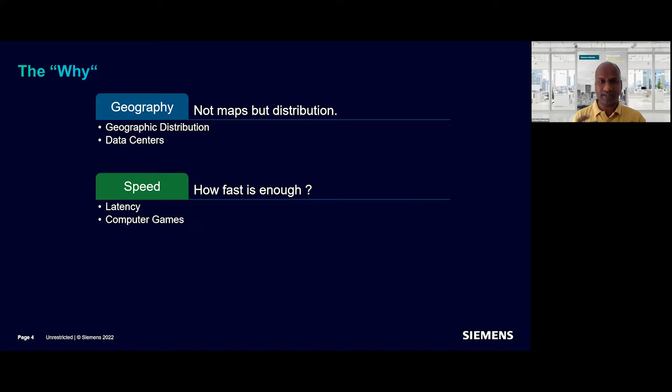And third, a very important attribute I would like to introduce is something called human nature. Today, if I'm doing any operation on my computer or my smartphone, I expect results immediately. The moment there is, let's say, about 5 or 6 seconds delay, I become a little impatient - something is happening, probably it's not working or whatever it is. So that also shows that a lot of processing in terms of maybe UX, where I give feedback saying don't worry, it's happening - things like that.

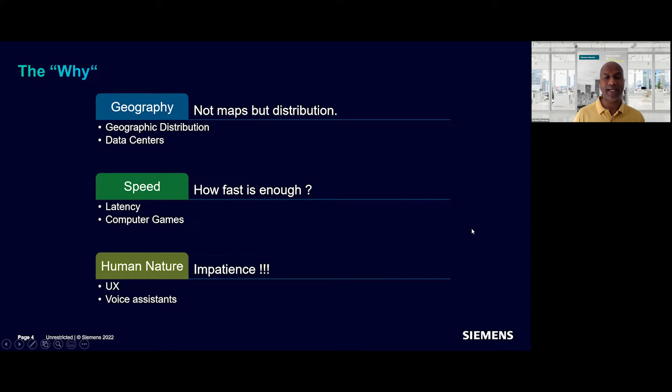Voice assistant, for example, we have at home - I can speak to Alexa, say what's the temperature today? I expect immediate results, otherwise I think maybe this guy is not functioning. So these are some of the attributes which take us towards what is needed in edge.

And moving on a little bit towards the huge organizations, the big money people - for them, from their perspective, why do we need edge? One of the most important things is cost, which is driven by connectivity and communication. So when I say connectivity and communication, if I need to be connected to the whole world in whatever ways we need, I need to pay for it. The connectivity itself, I need to pay for it. So it's cost for me.

And when I send data through these networks, the bandwidth, I also need to pay. Individually, when I use this connectivity and communication it may not feel so expensive, but the huge manufacturing industries or energy industries, when they start using it over a period of time, the cost can be really high. I mean, even we can look at our electricity bill - some months, if it's too high, we get a little worried. So you can imagine what the huge factories need to face. So that's an important aspect.

And the last point that I've covered, but I think the most important one, is data security or data privacy. There are still a lot of industries out there who don't want to share the data. They have their own IP, and the IP is protected by the data that gets generated out of these factories. So they want to ensure that the data remains within their factory. Data security and data privacy plays another very important role in what we drive in terms of edge. So that was roughly a short introduction to edge.

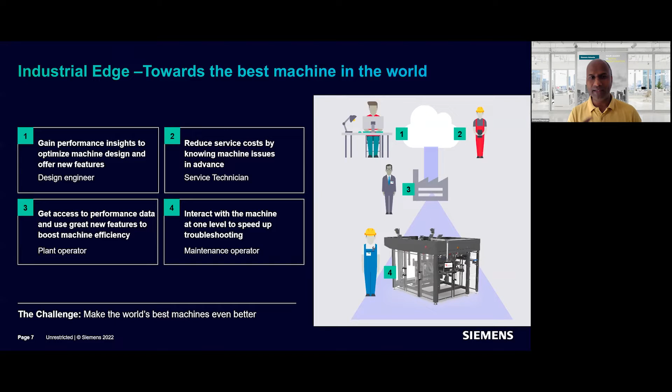So the challenge now here is to all the time make the world's best machine even better. That's the goal, right? For all of us in any work that we do. And this you clearly see, Edge is getting us there.

Now let's look at what this gives us when we do all of this, right? So industry IoT, we know IoT is rapidly growing. It's a market which there's no bound on how fast it is growing, and these IoT devices or the sensors and the things that can get deployed, the really small machines, are completely changing the way we interact with a factory. So this goes a long way in enhancing the edge profile as well.

What they could do is, by having a lot of data in the environment where it is being operated... we also have our software, right? We test it really well. We ensure zero defect if possible before we release it to production. But we clearly know once it goes to production, we still get a lot of defects or it behaves in a different manner. So the environment where it functions is completely different to how an OEM would test the machine within their environment.

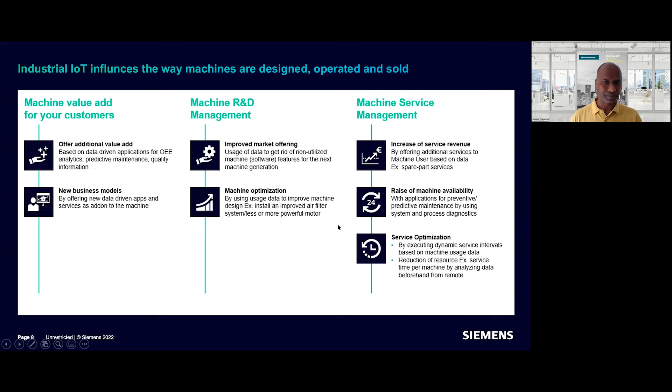And then now let's look at it from a little higher abstraction. What's clear is the data that gets generated in the machine needs to come out, and then that has to be utilized. Now let's look at something called extended machine functionality.

And what are the benefits of this PLC? Why do we even today use PLCs, right? These PLCs, one, can work in a ruggedized environment, like heat, humidity, and still work well. Another important aspect is the real-time behavior it gives. And third, most important, is the consistency it gives. I know customers who have bought PLCs for their factories. One of the beer manufacturers, for example, in Germany, bought this PLC and installed it about 20 years back. And today, even now, if we go to them saying we will give you something new and really interesting, they still hesitate because they're very happy with the way it functions. It's been 20 years, but the PLC installed is fantastic, and they're very happy not to touch it. So that's how important PLCs are.

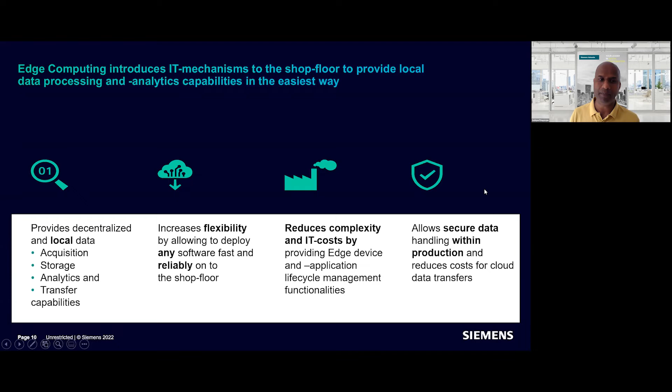Doing this once looks okay, but imagine a person needing to do it the whole day. The operation can become really tedious and a little irritating for the people using it. So the UX is not really good.

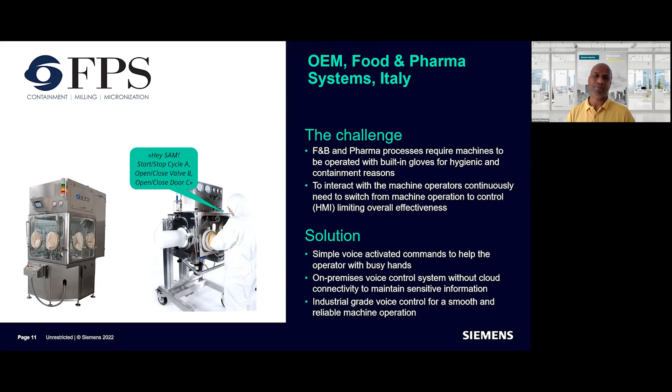That was a small example I wanted to cover. So now we saw what possibility exists - of course we only saw part of it. There's a huge scope, but there is a lot of potential in the manufacturing industry to bring in edge solutions and improve their overall output, or improve the business itself.

So what do they do? Today there are multiple vendors offering edge solutions, and we know that IoT and these technologies have ensured that anybody can do it - I can start a small startup and actually provide a solution to a customer. So how do manufacturers go about getting a solution done for themselves?

One possibility is they can use open source products. Today, anything you want to do, you just search for it and it's available in some form or the other, then you do a little bit of tweaking and you can utilize it. So open source products can be used, and maybe they need to integrate and extend it a little bit to create a solution for themselves. However, we also know the stability of open source varies - some are really good, but not all might be really good. And how long is the support going to be available? That always becomes a question mark.

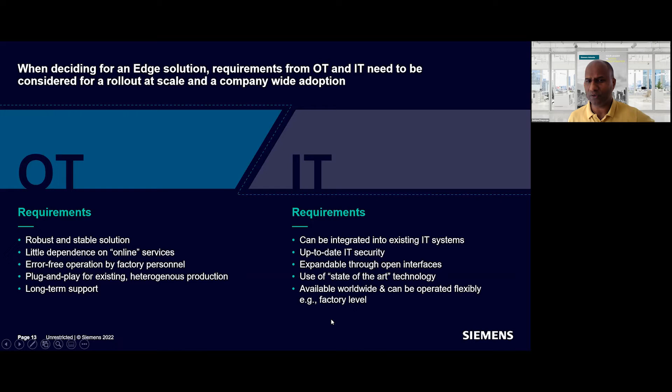That's very important - do we use state-of-the-art technology? Also important, when somebody wants to buy something, they want the best. And of course, available worldwide. So these are some of the OT/IT requirements that the manufacturing industry would expect in an edge solution.

So now that we have understood what exists, what are the requirements, what would be really important, I would briefly like to speak about what Siemens has to offer. Of course, there are a lot of competitors available. Now that I come from Siemens, I would like to explain what Siemens has to offer. Similar products, I'm sure, exist from a lot of competitors as well.

So what is our philosophy here? Flexibility - we know Siemens has existed for a really long time, and there is a lot of experience. Siemens makes machines, Siemens makes software, and it's all deployed, with quite a bit of market share. So flexibility in terms of integrating perfectly into existing manufacturing plants is completely provided by the edge philosophy that we have.

Focus on IT and OT - this is done in a big way. We will see in the next few slides how they are completely open for IT systems to get integrated, which gets into the OT, the great robust systems we have today.

Completeness - when I say completeness, what it means is we looked at some of the cons in utilizing what startups provide. These manufacturing industries, like BMW, are producing cars, so they don't want to get into an integration software job or developing something - that's not their core strength. They would rather concentrate on what their core strength is and buy something from outside. So while doing this, they want to ensure that when I buy a solution, it's end-to-end available, completely out of the box - I don't need to do anything. I'm ready to pay you a premium. So that completeness is available here.

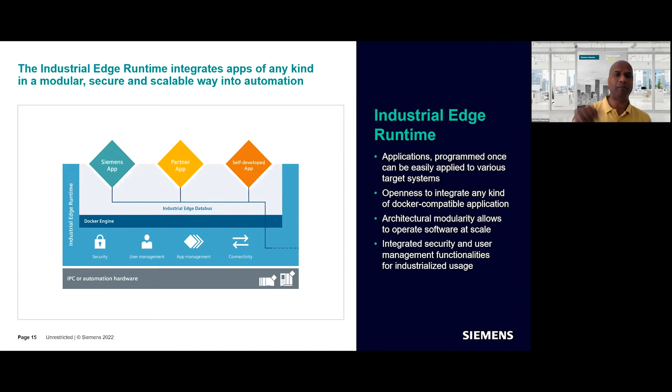On top, what is possible is Siemens can have its own applications, or a partner - say a manufacturing industry - can develop their own applications and push it in, self-developed applications. Like today we have Android, I can sit at home, develop an Android app and upload it in the Play Store, and anybody could use it. That possibility is there as well. So this is being made possible here.

How does this whole industrial edge get deployed? There are three layers. One on top is something called Industrial Edge Hub, like we have the Play Store, or a Docker Hub - that's public, anybody can go and upload their applications.

Of course, there are certain minimums - I wouldn't say standards - but certain tests expected for it to be robust, and the application needs to be reliable. That needs to be met with, and then it can be uploaded.

The second part comes, something called industrial edge management - it gets deployed within the factory, within the factory data center where they have certain computers. So it gets deployed there, through which I can then orchestrate or have a look at my entire edge ecosystem. The last one is, of course, the edge runtime, which gets deployed on the edge IPC - industrial PCs, or an HMI, or communication, or virtualized hardware.

This is another interesting one, because today I can ask for an EC2 instance, for example, on Amazon whenever I want, and I get it - the scale is huge, I can reduce my need or increase it. Similar possibilities also exist today using virtualized infrastructure and any certified hardware - it doesn't need to be from any particular company. It can come in, and this whole ecosystem works.

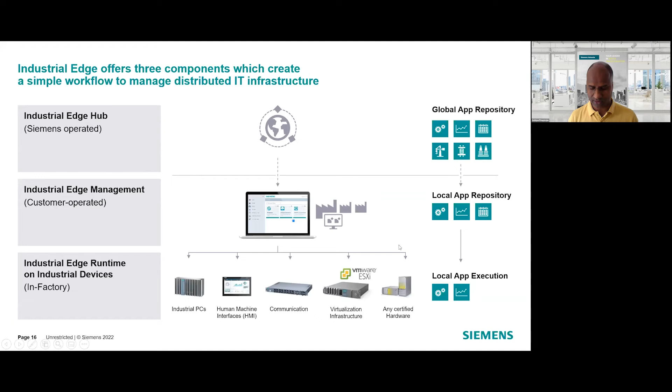So I would quickly go through some of the off-the-shelf applications that exist today, which clearly target the use cases that we saw right earlier.

So you can see here, these are the southbound applications which help me connect my edge or the IPC to the various machines within the factory. Let's start here. So SIMATIC S7 is one of the connectors which takes care of the SIMATIC protocol. OPC UA, we know it's a standard protocol. SIMOTION, SINAMICS, and SLMP are other connectors which help us connect to the various devices that operate in the factory.

There are also some generic protocols being supported. These are all, by the way, different applications - you can just download them and deploy them. So Modbus TCP connector, Profinet connector, EtherNet/IP connector, MQTT, we all know, and OPC UA, we saw this.

Apart from this, there also exists something called cloud connector. So if my factory data comes in, as we saw in Edge, certain data gets retained here, and some of the data needs to be pushed to the cloud, and that is possible via MQTT. For example, I use an MQTT connector here, and this can directly send data to AWS IoT Core using the MQTT connector. So that's a possibility. Once the data comes in via this connector, it sits on something called Industrial Edge Databus, which internally supports MQTT. This is another application, and it can be configured using the services that exist.

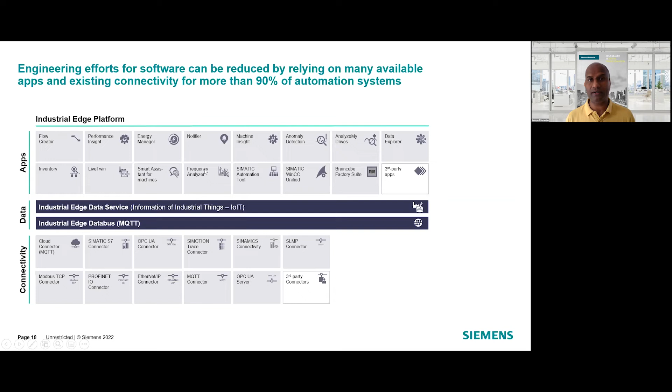And on top of that are the most important ones. So these are the tools for me to connect to the industry. But once I connect to the factories, what can I do with it? These are some fantastic applications - not just from one company, but there are also third-party applications possible, as we saw. So like Flow Creator, Performance Insight, and all this is available on the internet. You can have a look at it if you're interested. So these are available. I would like to go into a little detail on a few of them.

So one of the applications is Performance Insight. What does it do? It is targeted for the plant operator or a machine operator, right? More of a plant operator, because it helps us - you see the tabs here - connect it to, let's say, energy meters, motors, alarms. So you can connect to various parts of the plant, and this application also provides widgets where you can decide how you want to look at it. Let's say I want to look at the time series data getting generated in a bar graph - you can decide to look at that.

So this makes it very efficient for the plant operator to sit and find out what is happening on the plant. He doesn't need to call up people or go and see - he gets what is actually happening because they're all connected, right? And this helps the person do quality improvement and something called OEE - overall equipment effectiveness, or in this case, the plant itself. So this is a really nice app.

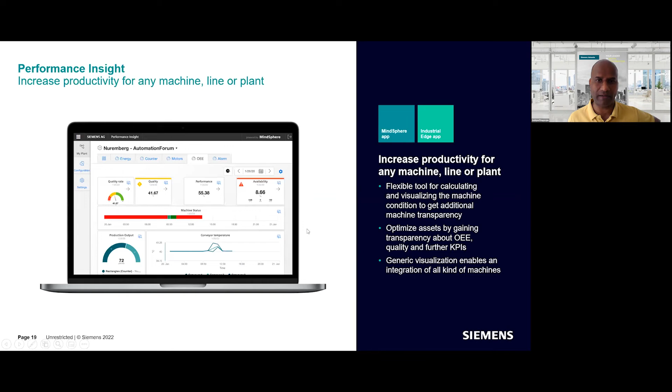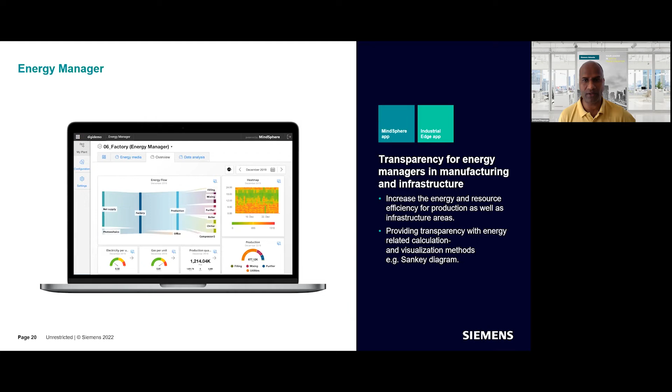Energy Manager. People want to have transparency into their whole factory, right? Where energy is spent more, where it is spent less. Probably this is the area where there's a lot of energy being spent, but then certain things are not operational beyond night, let's say.

So it gives the possibility where I can reduce my cost by understanding what is happening within the plant. Anomaly detection - very important one. So if I can connect some of my devices to this application and collect the data, I can find out how the flow is happening, right? It's possible that, let's say, there is a machine which is operating and it's slowly degenerating or degrading.

So it doesn't happen that one fine day it stops - you can see the signs that it's going down probably. And now if you connect that here and monitor the key performance indicators, KPIs, right, you can find out that in a certain time period there is an anomaly. So when that happens, you can clearly connect this application to, let's say, something like an alarm generator, which we'll see next, which will warn or notify the plant operator that something is going wrong - probably I need to call the technician or talk to the OEM. So this is being made possible by this application.

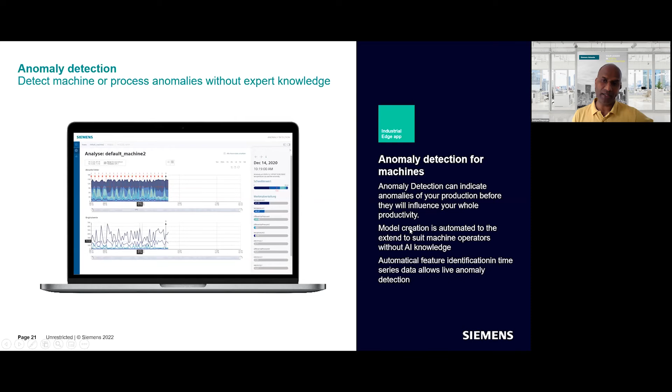And with this application, operators also want to get a little bit into the future as well, right? Some kind of prediction, like how long this runs before the oil dries out, for example. So even that support is provided here, where you can create some kind of model - existing models - where the person doesn't need to code, but it's available out of the box.

Notifier - so we saw a use case in the anomaly case, right?

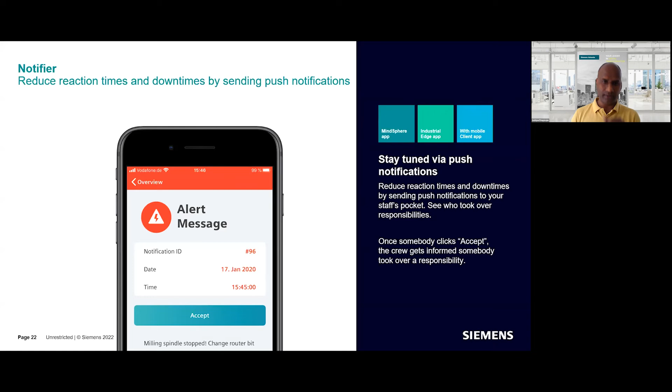So there is an application which is running. I can also use this notifier and connect to various operators of the plant, where, if an anomaly gets generated, I can configure using this application that please send this message to user 1, 2, and 3 on the mobile or smartphone. And if the operator responds saying, okay, I will look after this, then the message goes back to the notifier application. Everybody gets to know this is the person who's looking into the issue. So that makes the orchestration of the issue easier.

Live twin, my favorite one, very important one. So if you guys have visited the plants, they're not always very easy to go around. Sometimes it gets very hot there, very humid there, sometimes very dusty. So it's not always possible that I can install sensors or devices in all possible places. So what do we do then?

Let's say I want to monitor temperature at a particular place in a machine. That temperature is not independent, right? It is actually dependent on many other things, probably the power consumption it has, or the pressure that part of the machine is taking, and so on. So theoretically, using the software, I can connect those important KPIs of that machine and then simulate a temperature in that part of the plant, where I'm not able to put in a temperature sensor. So this helps us create our own live twin.

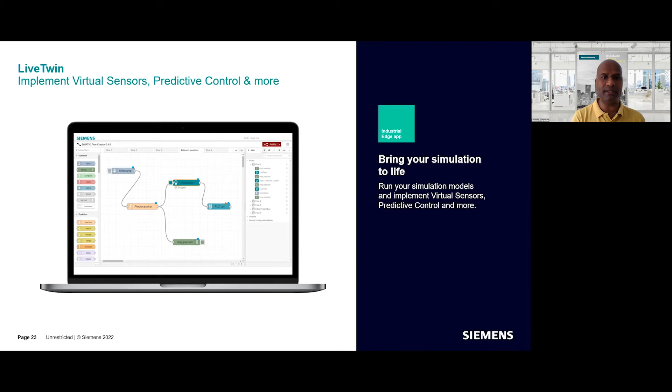So when I say digital twin, this is a live twin because the data gets fed in there and it simulates and gives you the actual value. So that's another application available.

Machine insight. So previously the performance insight was for a plant operator, and this is for a machine operator. So the key ingredients or the data that gets generated out of the machine, which we saw, can be monitored using this.

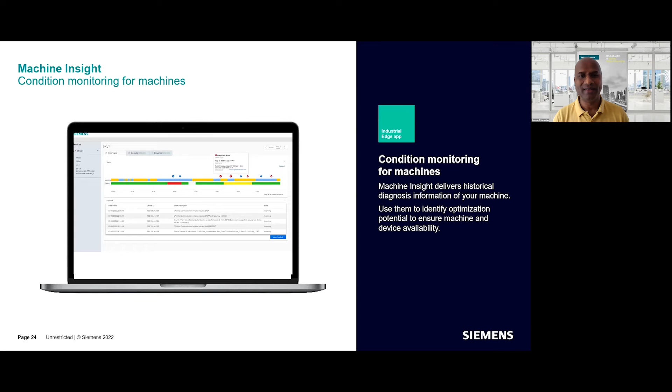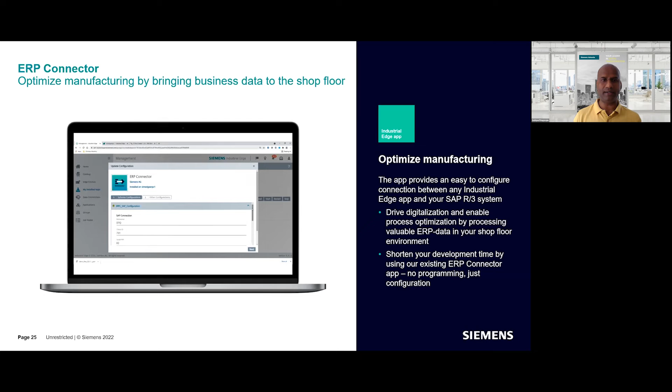And the last application, which is an ERP connector. So today the application is provided where, if let's say the plant has an SAP, how do I connect to that SAP and have the flow happening over the plant in a smooth manner? A requirement comes into SAP saying, please produce, let's say, 40 items of this version, and then that can get into the plant, and we can control that IO using this application.

So yeah, that's roughly what I wanted to cover today, and I hope it was useful. Any questions or feedback?